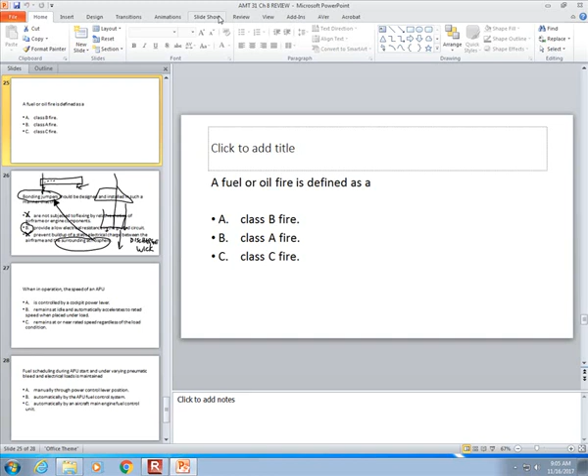Wyatt. Yeah, please don't use your cell phone in class.

Thanks. I made an error yesterday. I found out how come I made the error. I got classes off of a website from Great Britain. See how easy it is to find things on the internet that somebody thinks is true, but is actually not true for you? In any case, I looked it up on 17 different sources. Okay, maybe not 17. But I got Class A correct.

Class A fires are typical solid combustible things like wood and paper. And, pardon me? Well, I'd say if you burn jet fuel, you're going to get ash. It's just in really smaller pieces. So I personally wouldn't use that definition. Class B are flammable liquids, jet fuel and aviation gasoline and engine oil. And Class C are electric.

Sounds like paper and wood. Oh yeah. Easy fire. If you burn a road flare in the water, it keeps. And that's a small fire. Okay. So we're going to keep going there.

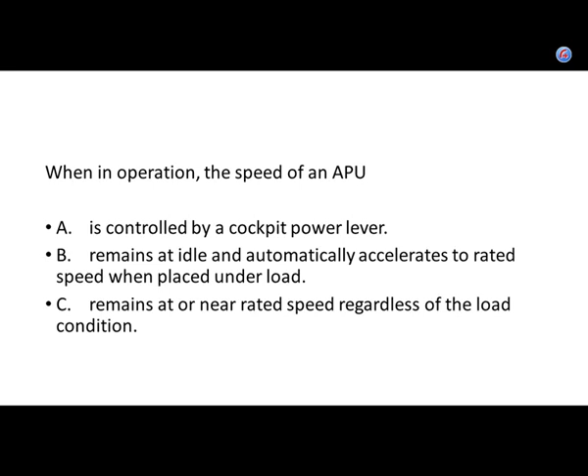Yes, excellent. So look at letter A. Is there usually a power lever for the APU in the cockpit that you can move? Never done. Never, ever done. How about remains at idle and automatically accelerates? For an APU, Dominic, what's the difference between idle RPM and full power RPM? It's the same RPM. There is no difference. And what is that RPM? About 100%. Man, it's like they wrote that FAA question just for me.

Yeah, I need this row. Louis? I see you're taking notes. I didn't want to interrupt you. Did you finish writing? That's cool. Louis? Sorry, your name. So it makes it easy to point you out and harass you. So, do you have any questions? Surely you have some questions. That's where you say, yes, Mr. Johnson, I have questions, and please stop calling me Shirley. Okay. Y'all are going to have to figure this out before the end of the semester.

So do you know what fuel scheduling is, Luis? Have you ever been scheduled to work? Yeah, this isn't the same kind of scheduling. Fuel scheduling is the fuel control unit deciding how much fuel to squirt into the engine. The scheduler would decide that to get the fuel control. Do you know what a varying pneumatic load is? Pneumatic, the APU having a separate compressor.

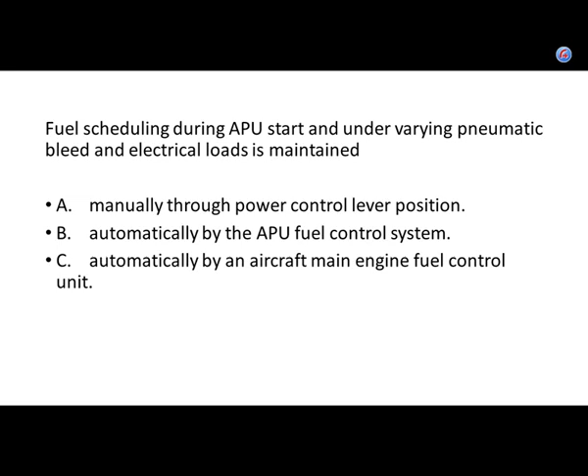I got lucky. I got my pilot certificate, and 6 months later, I started aircraft mechanic school. So I took flying lessons while I was taking mechanic lessons. So I'm not prejudiced for or against pilots versus mechanics, except every now and then when I think pilots are really stupid. I got my AMT in May of 1980, and I got my flight instructor certificate the next month in June of 1980. But I got my private pilot certificate technically first. But I had a tour of this building before I started taking flying lessons. Does that count?

Okay, see? I started working on cars. I changed the main bearings and the rod bearings out of a big General Motors V8 before I ever flew an airplane. Does that mean I was a mechanic before I was a pilot? I actually did that before I'd even driven a car. I was lucky. My grandfather retired when I was 7 years old, and so I ended up hanging out in his garage and fixing cars because he thought it was a sin to take your car to the shop. Of course, in the 1960s, how much of the work on your car could you do in your garage in, say, 1967? Pretty much all of it. Yeah, if you had a voltmeter, that was the electronics you needed. Yeah, I've got a voltmeter. Woo-hoo-hoo.

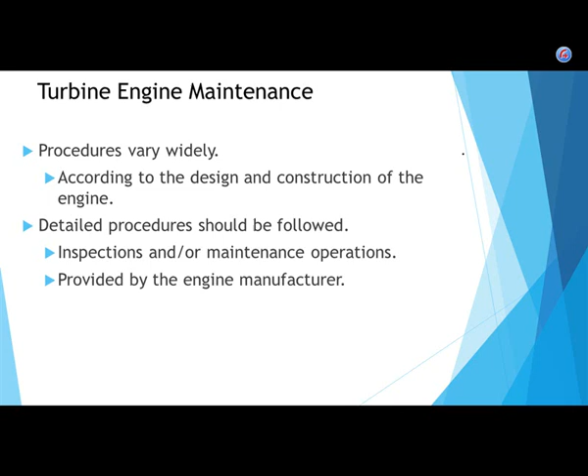All right. Cold section versus hot section. It would be very easy to describe a list of engine parts. You can tell me which one.

The inlet and the exhaust I probably wouldn't call part of the engine. They're usually provided by the airframe manufacturer, in particular the inlet. But yeah, the compressor section, and if you wanted to break out the diffuser just before the combustion section, that would be on the cold side. But now the combustion section, the turbine section,

although this has lots and lots of parts, if fuel has been squirted into it and caught on fire, or it's any farther downstream of that, it's ridiculously hot, that's the hot section. If it's just prior to squirting in and getting burned, anything there and before is the cold section, because it's relatively cold. And when I say relatively cold, I need another victim.

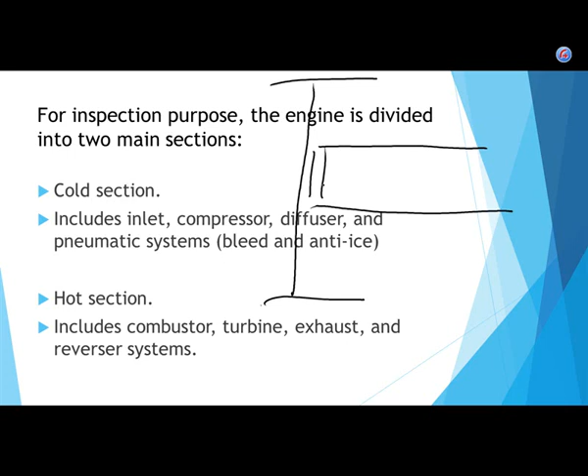So here's the jet engine, and we'll put a big giant fan on it. But here's the compressor section. And we got some turbines in the back, and here's the combustion chamber. So we're going to bleed air off right here. We're going to take air off of the compressor. And the fuel nozzles are right there. So the fuel hasn't got to the fuel nozzles yet. So this air, we're going to say it's between 400 to 600 degrees Fahrenheit.

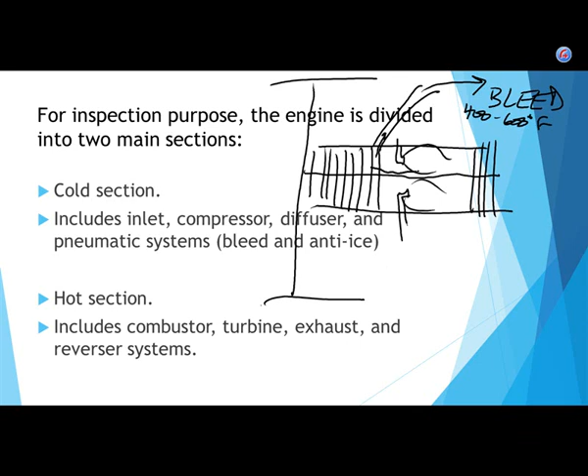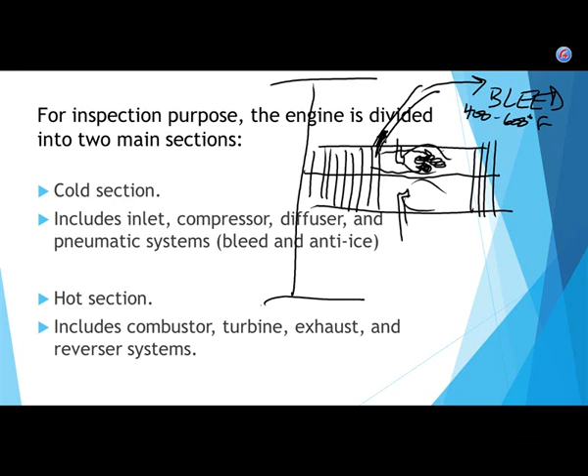That's true. If we let the air keep going, we're definitely going to want it to mix around with the combustion gases and keep the inside of the engine from getting too hot. But I'm talking about the air that we let out of the engine before it gets there. We're going to bleed air off of the compressor. Yes, can you name one system that uses this bleed air? Pardon me? The control systems for...

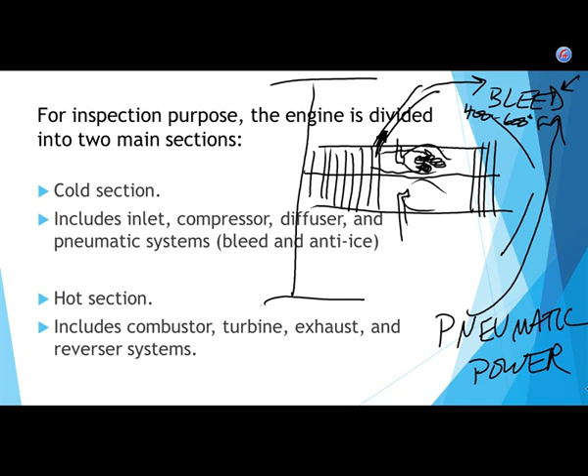Engine control systems. Yes, because you could use this bleed air to operate thrust reverser doors or something like that. So yes, the pneumatic, another word for this bleed air. Very good. We could use it to start another engine. And that's usually what happens: you start up that one engine with an APU, and then you start all the other engines off of the other engines that are running. Okay, thanks.

All right, line maintenance versus shop maintenance. It also might be called line maintenance versus heavy maintenance. It also might be line maintenance versus depot maintenance. When I was in the U.S. military, I worked at a pilot training base in Del Rio, Texas.

It was about 20 miles from the border of Mexico, Ciudad Acuña. As far as I can tell, I never went. I had a friend of mine that would go to Mexico on the weekends, and they would seek out entertainment. I was married with a kid. I didn't go to Mexico seeking entertainment. They did have a really nice market there. So now and then my wife would come along with us, and we'd go during the day on Saturday or Sunday. Go to the flea market. I don't remember what I bought there.

In any case, we had on the flight line a ramp where the airplanes were parked. At that base, they didn't keep the airplanes in the hangar at night. They were going to fly them the very next morning at 6 a.m., so they didn't pull them into the hangar. They did line maintenance out there. And it could be as much as taking the engine out, putting the engine on.

We saw engine removal and replacements, engine R&Rs. At least two of them, they brought the engine into the hangar, but then they pushed it back out at the end of the shift. I think one of those, wasn't one of those 737s, they did the engine change outside? I think one of them they did the engine change outside.